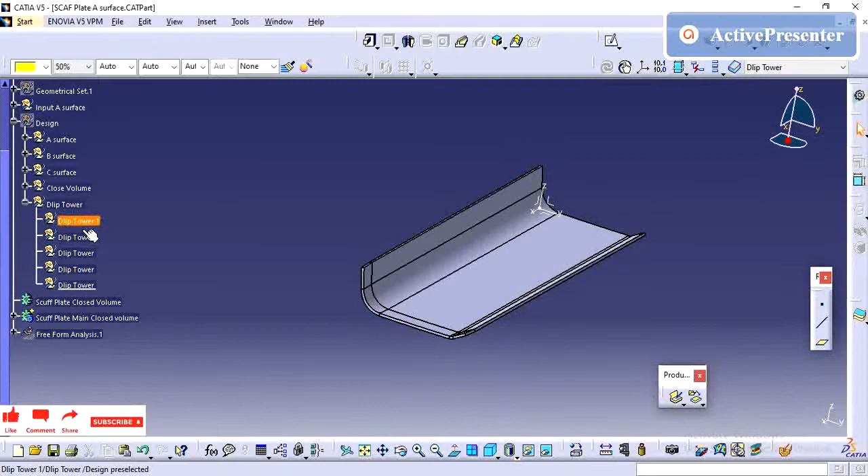I am just creating the geometrical sets. I designed the clip tower doghouse by giving the input of point, axis and direction. So what I am going to do is create the inputs for the doghouse tower clip.

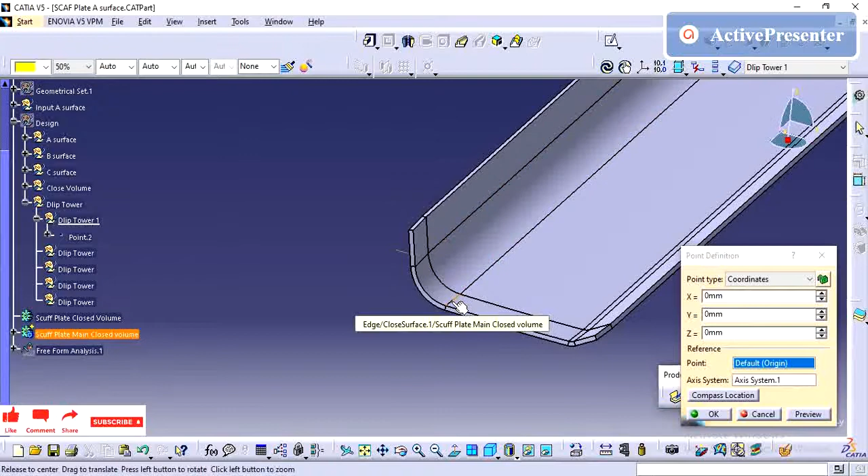Here we will see the attachment strategy. This part's overall length is around 390 mm. So my first attachment should be from the end of the part, and it should not be more than 25 mm. So I am going to create it near, taking 20 mm.

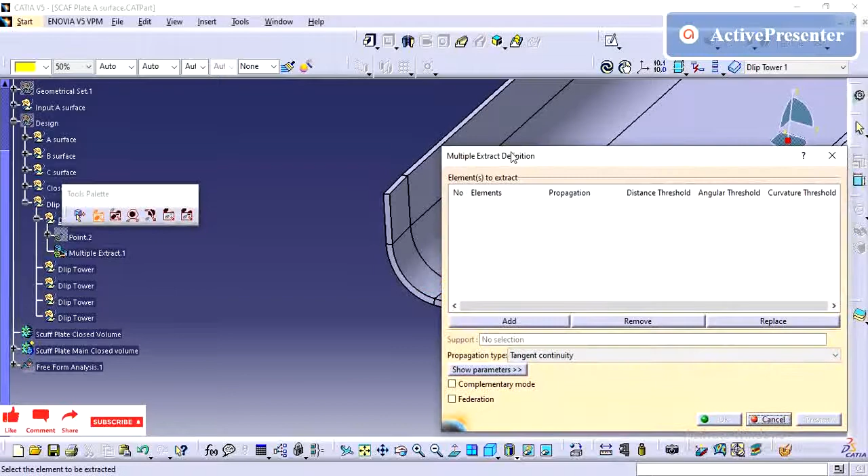This is the initial level, which you can create by following the design rule. In later stages, after getting the CAE analysis, your fixation location may change according to your test report. So for initial purposes, I am maintaining 20 mm from both edges to create the clip tower doghouse.

We are going to use the metal clip for this attachment strategy. I have created the clip tower as per the standard size. For standard features used in your design, you can create them and save them under catalogs, so it will be helpful whenever creating a part, and you can simply pull the profile.

So I am going to create the line with 20 mm from this edge. The same way we need to follow for all the 4 clips on the edges.

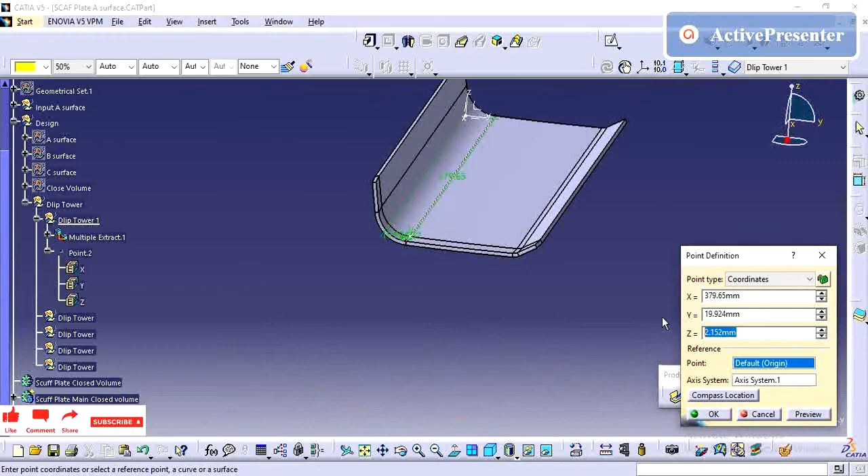If you follow this video, I have clearly explained it. If you want to see the close volume creation, check part 1 of the same sub playlist. Part 2 is this one, and part 3 will consist of door seal locator and B-pillar snap attachment. Part four will consist of the parting line creation and tooling direction.

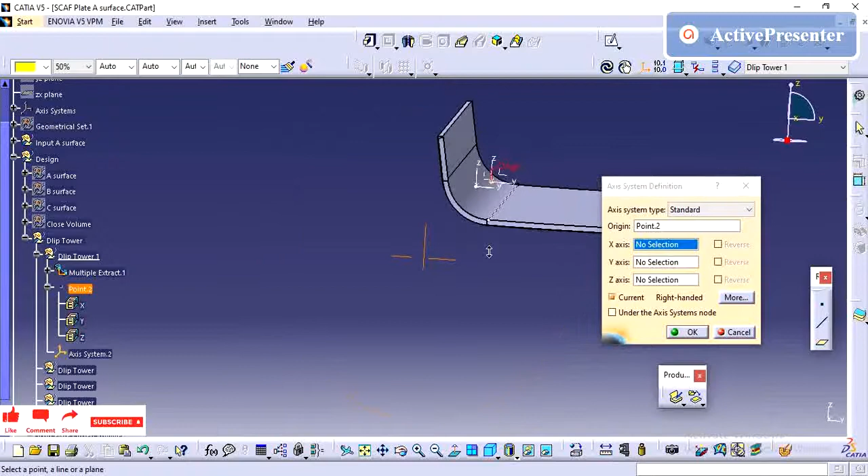This scuff plate part comes on the rear side under the door, so this is a hard trim part. This is the aesthetic part, located between the C pillar lower and the B pillar lower. In between these two, this part is covering the attachments.

In some of the cars, they will engrave the part name on the scuff plate, the car name.

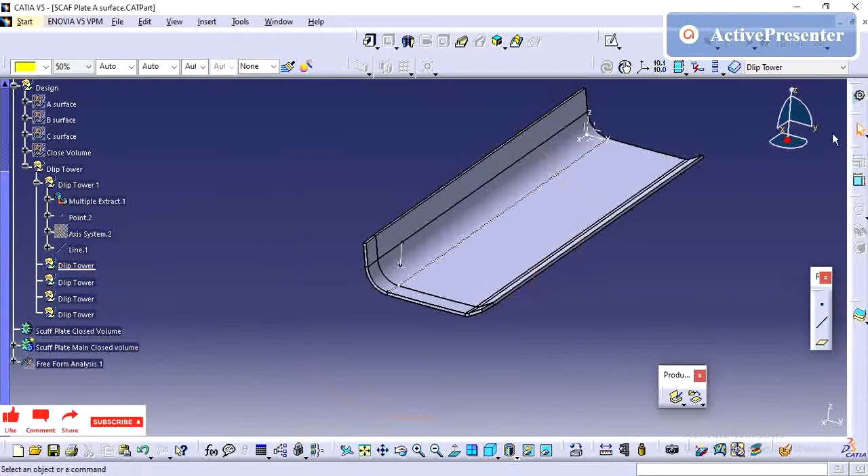So I have created the orientation line and I have created the axis system. The same way I am creating it on the opposite side.

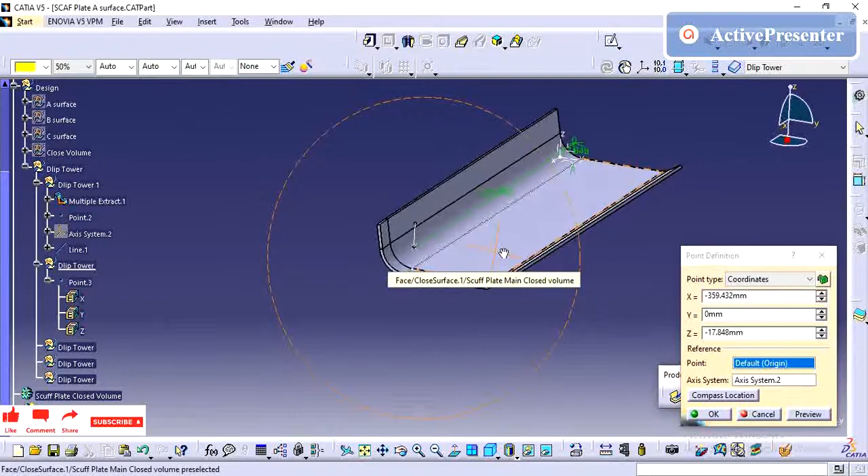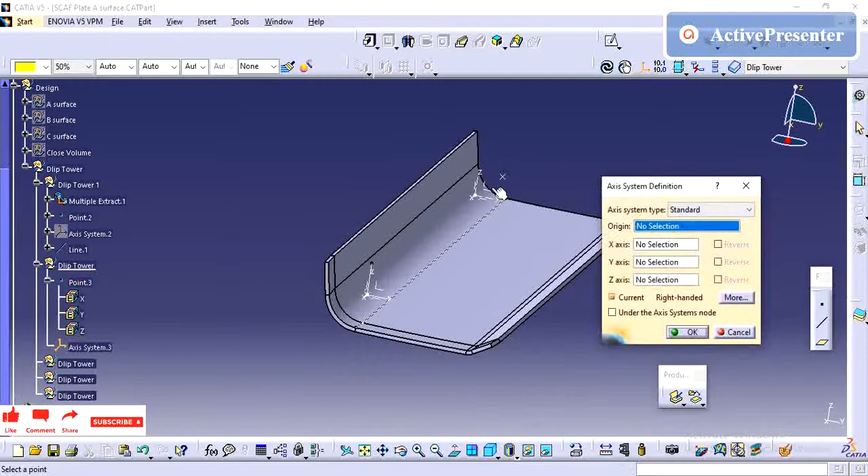Whenever you create the points, make sure it is related to coordinates, because if I want to move the doghouse in the Z direction, having the coordinate control points lets me easily move it.

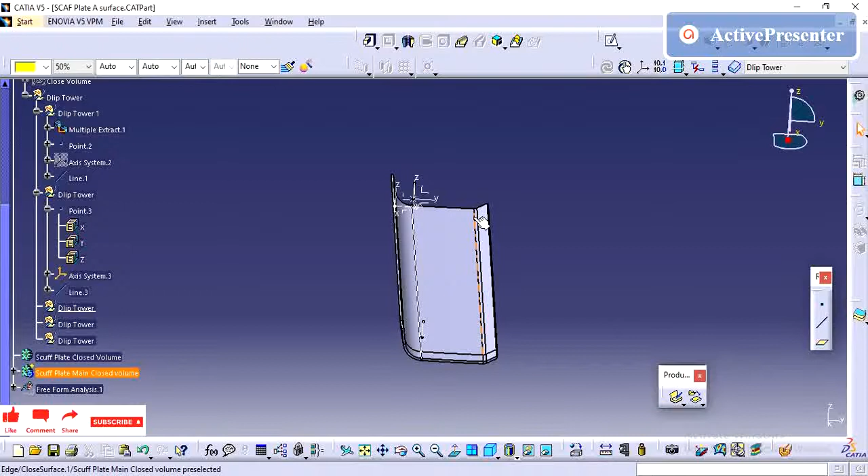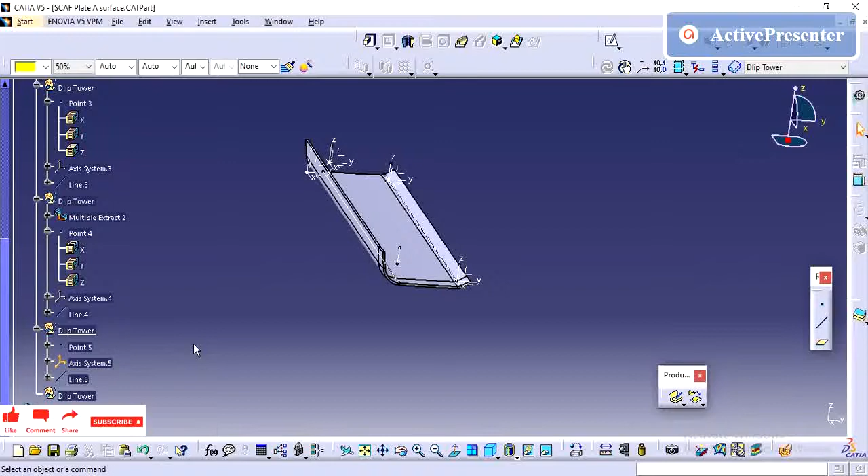So I'm going to pull the clip tower doghouse. I have already created it as a power copy, and the inputs also I have created.

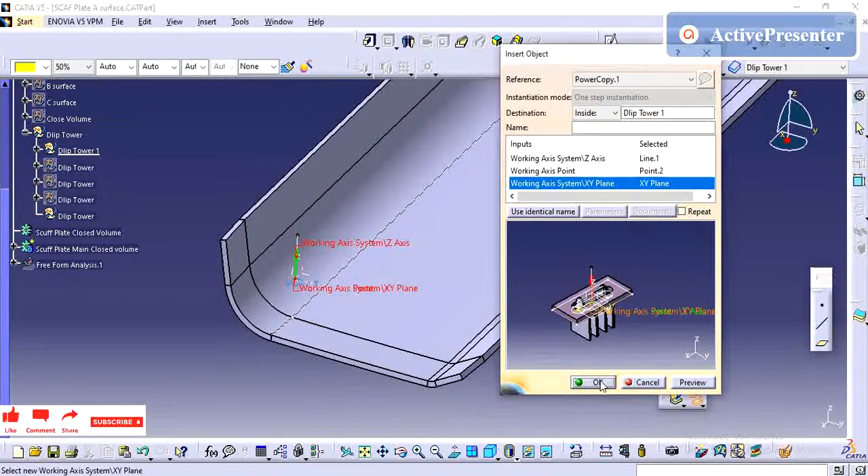First I am giving the orientation line, then point, then plane. If you want to see how to create the power copy and how to create the clip part, please check the description, I have provided the video link.

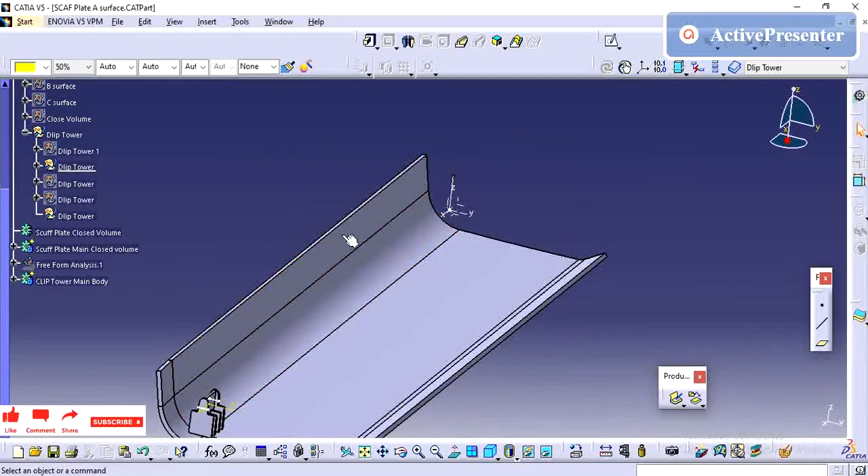So one side it came. For the second side I'm doing the same, for all the 4 sides we need to do the same. So for all 4 sides I have created and added in this video.

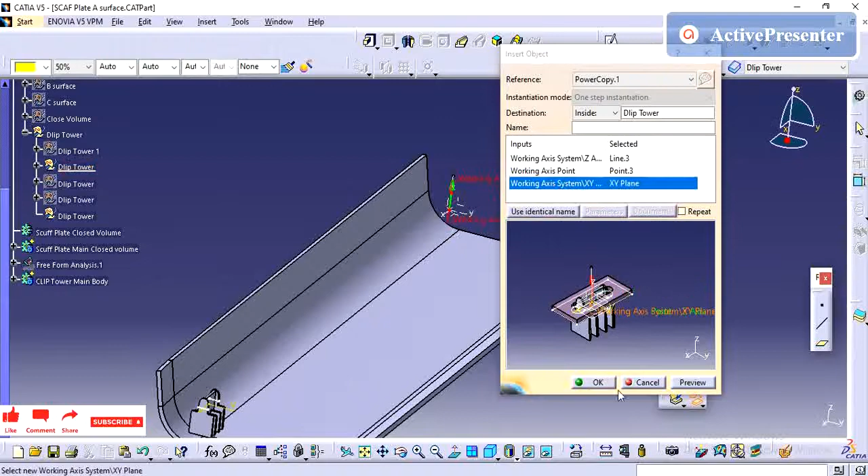From the edge of the part, your first attachment should be less than 25 mm. I have followed the same, and then you can have the second attachment below, in between, it should not be maximum 150, minimum 100 mm. So my fifth attachment will be on the center.

In this video I have not created the fifth attachment. To create it once again would take more time, so that is the reason I have not added it at the center. According to your requirement, you can create the clip tower and its orientation.

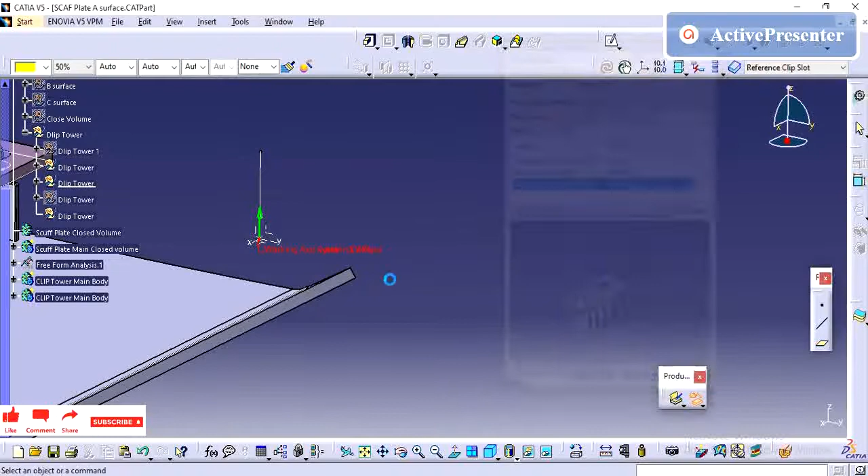80% of the scuff plate profile will be the same, and the same attachment strategy they used to follow as per this video.

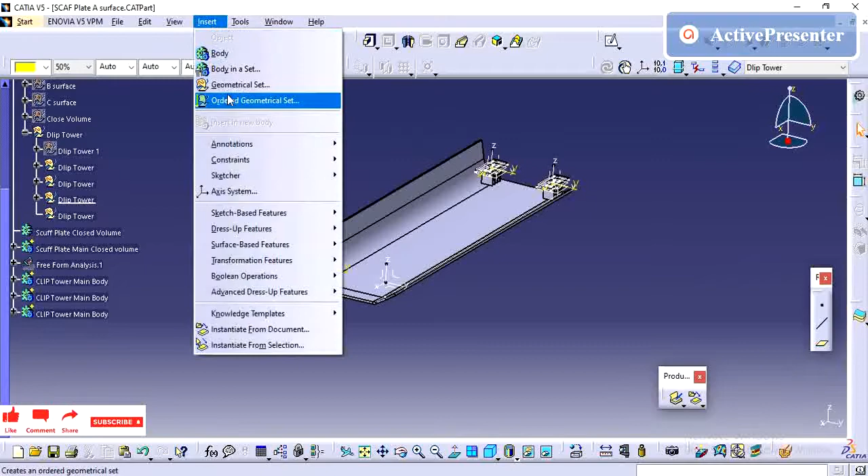If you are a beginner, this kind of trim part is usually given for the tool test. If you are looking for a job in automotive trim design, you can go through this video. It will be helpful for you.

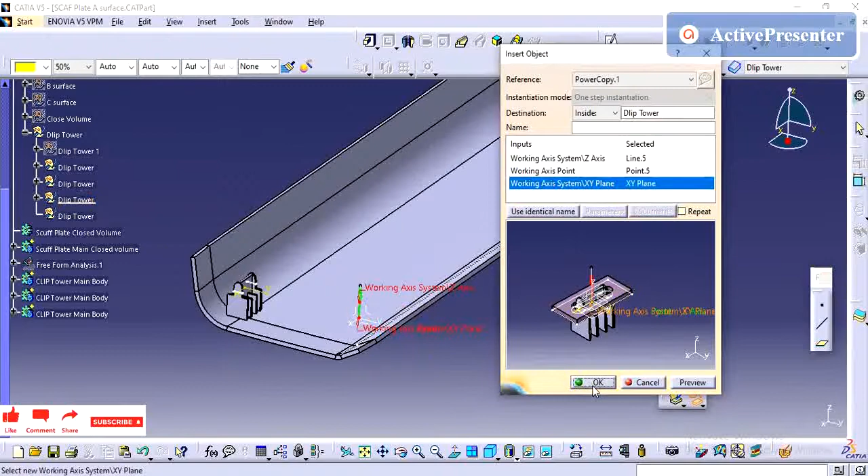So for all 4 sides I have created this. I have created it on 20 mm height. Later on I will change it.

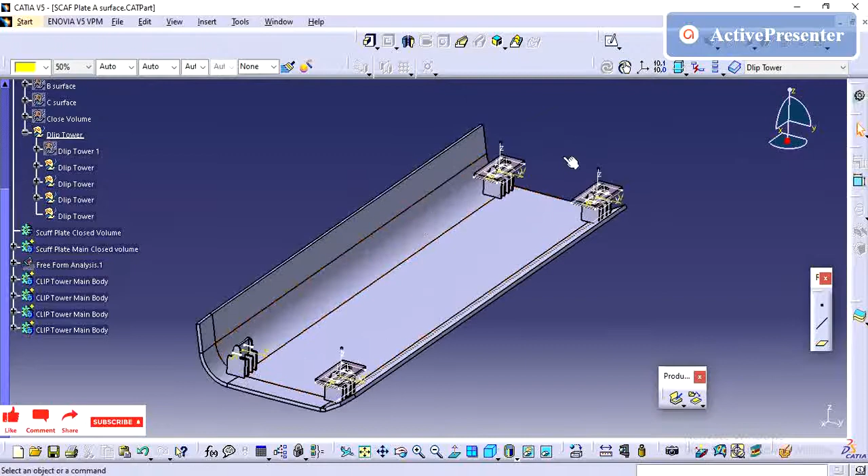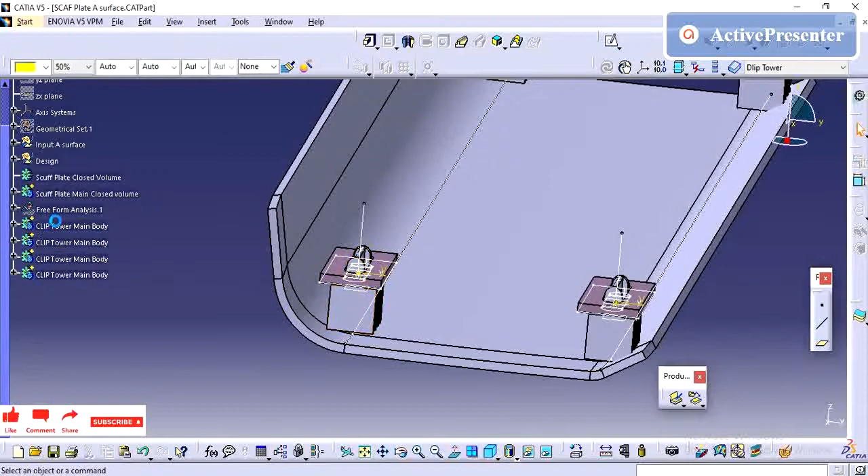So this one is reference. On the mating part, the attachment area we need to have this much flat at least, and this profile should have the bend, and it should match with the reference profile.

So next time I'm going to add all this clip tower inside one body, so that it will be easy to do the trim operation.

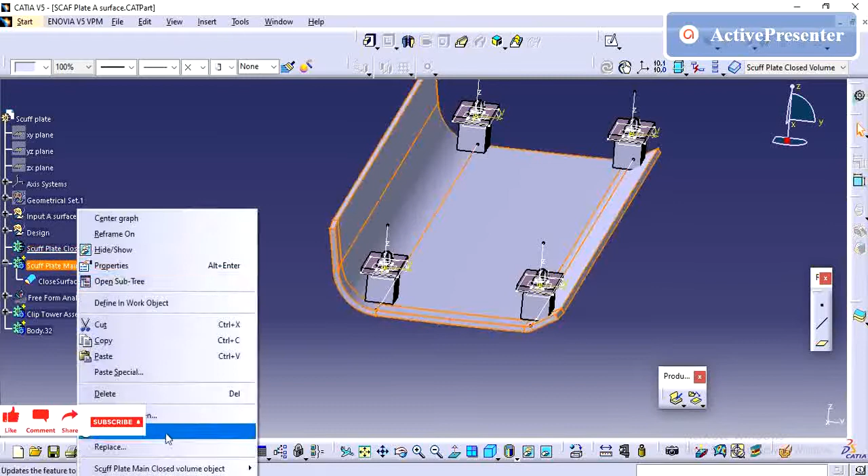Whenever you are adding any features, better you go with the trim option. Don't go for add or assemble. Maybe it will create some void on the part, so if you do trim, your profile will become proper without any issues.

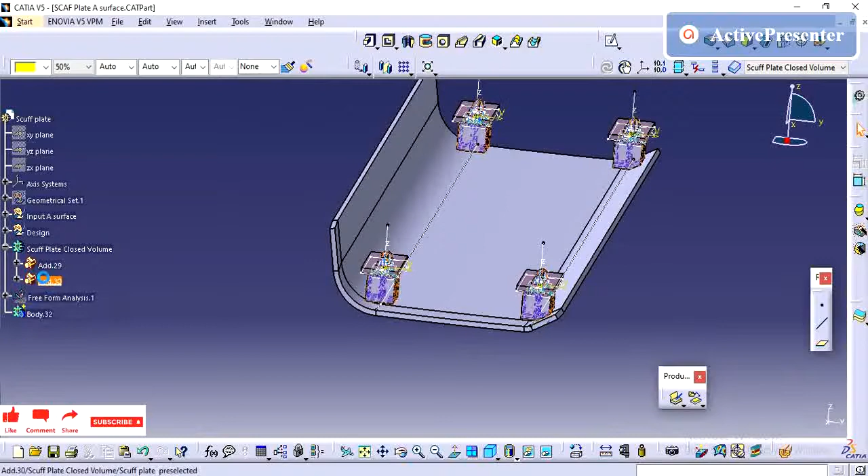So now I have added this. If you see, it is in the air. Just for checking that one, I have added it. If I have done trim, it won't create, it will show an error.

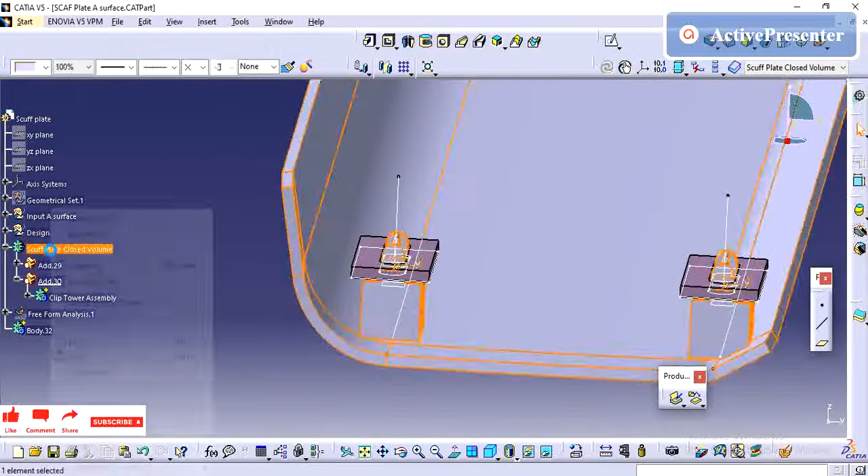So what I'm going to do is move this point below 5 mm. If I have not done this, the point created by coordinates will take more time while updating.

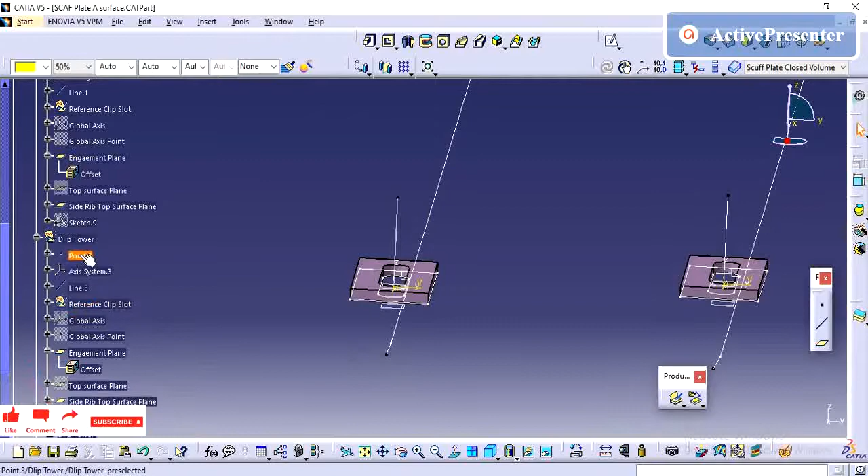So instead of 20 mm, I'm going to give 15, so that in the Z direction these all together will move 5 mm below, so that I can easily do the trim option.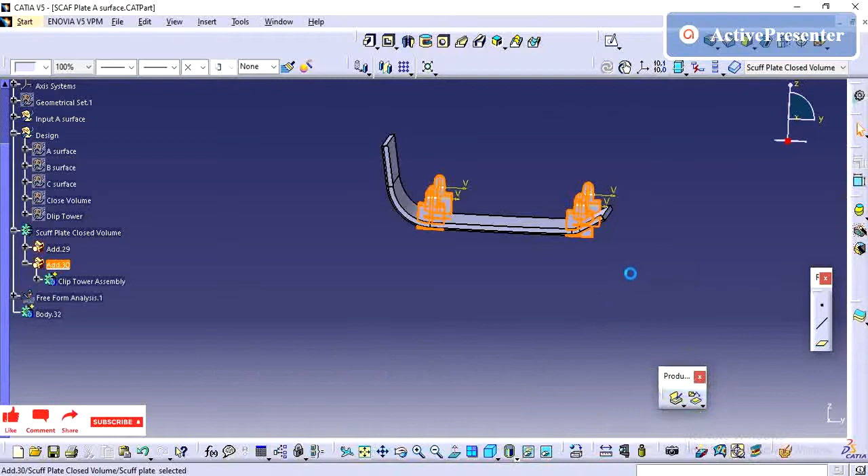I'm changing this add to trim. I'm going to select the surfaces which need to be trimmed on the rear side. If your profile is continuous, you can select only one. If it is not continuous, then you need to select individually.

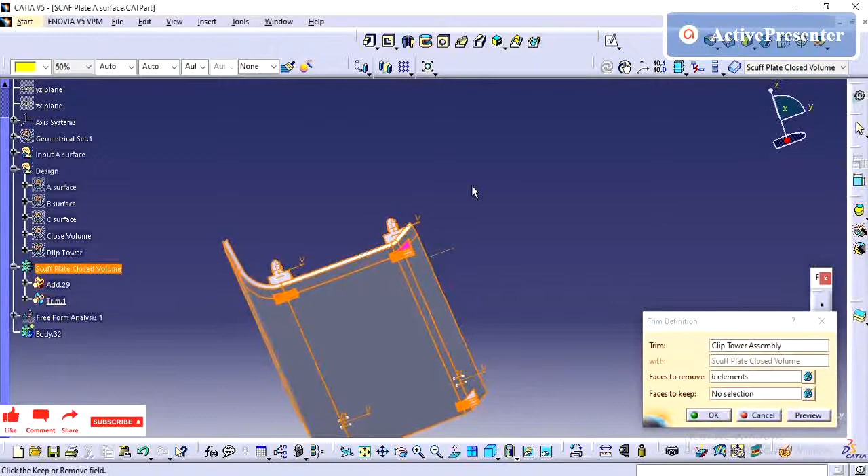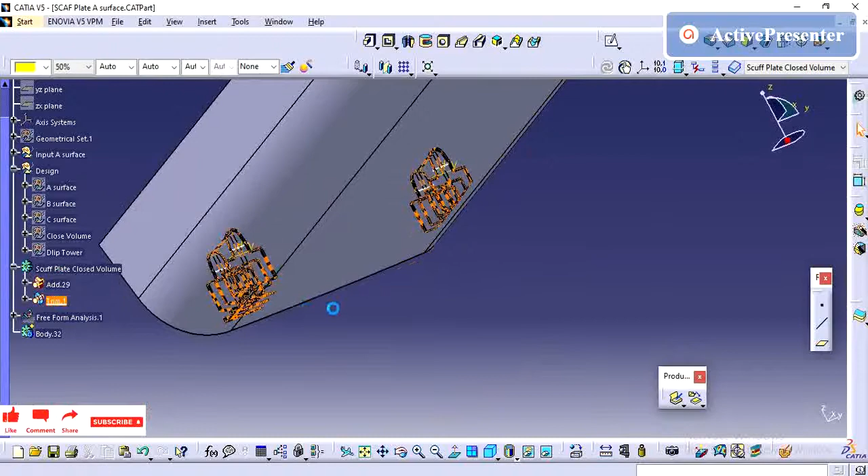Whenever giving trim, just check with one surface selected and give OK. If it is not trimming, then you can go and click on multiple surfaces. See, in this scenario it is not taking, so I need to give all these 3 surfaces to remove. This is how you need to work to reduce the time.

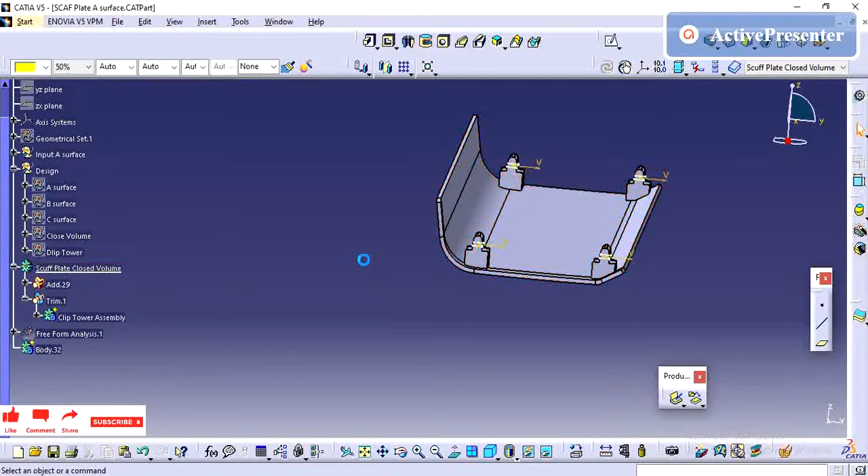So next we are going to add the strengthening ribs to the part. I'm going to create one more geometrical set for adding sketches, lines, points inside the design for the rib profile.

So I'm going to use the axis system for creating the sketch profile for the rib.

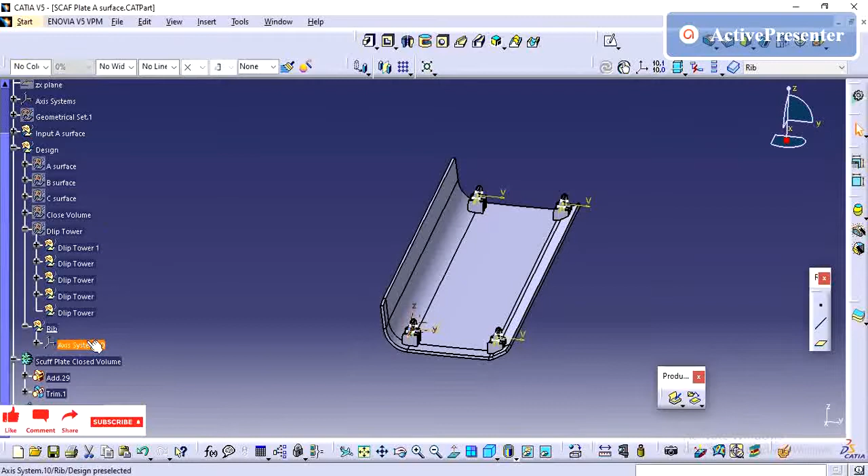For creating a rib, we need to follow the design rule. I have already created one video regarding rib design rule. I will provide the link of this video in the description. You can check that video for the design rule of rib creation.

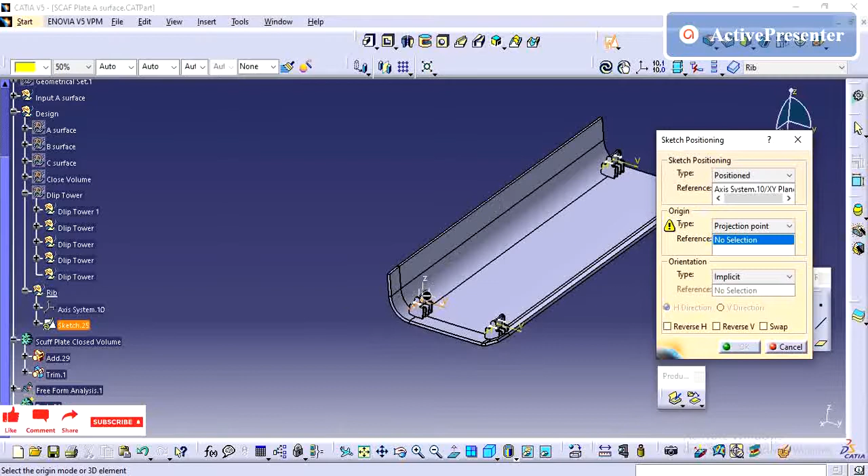So rib is to add strength to the part. If it is a longer part and if it is having any warpage, the rib will help to fix that.

I'm going to create the sketch.

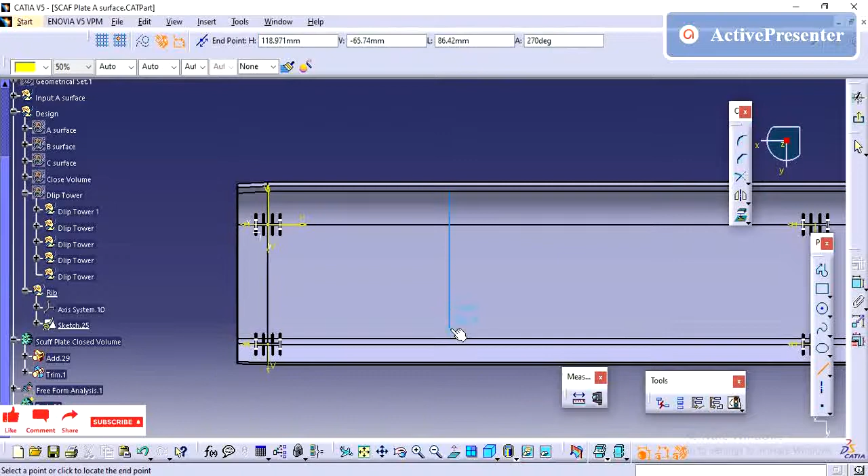So this part is a longer part, it is around 400 mm. So we need to have the rib horizontal to this part. If you are adding it vertically, there is no use. You need to add it horizontally so that it will reduce the warpage defect.

First, initially we need to add it roughly. Later on, once the CAE analysis is done, according to that you can modify your ribs, so that it will be a properly designed part.

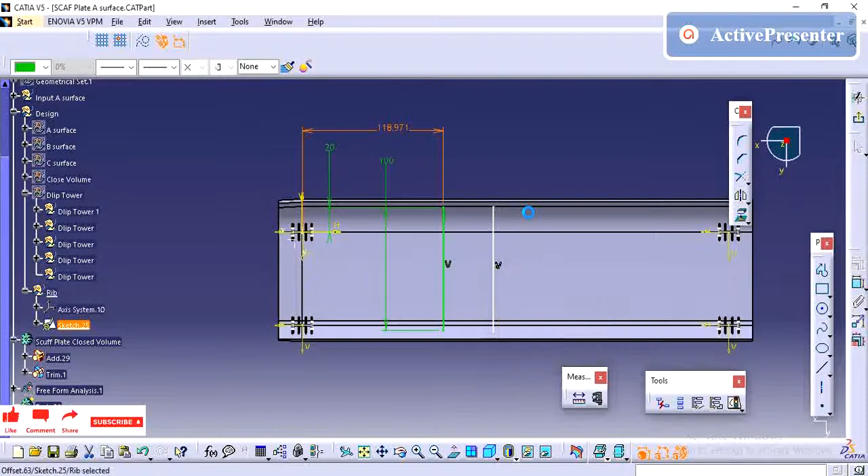And also we need to consider the environmental parts while designing any feature, whether it is having proper clearance or locking properly, or if it is having any interference. We need to avoid all interference with the surrounding parts.

So I have drawn one line and offsetting it to some 30 mm. And for instance, I have mentioned some 10 number of instances.

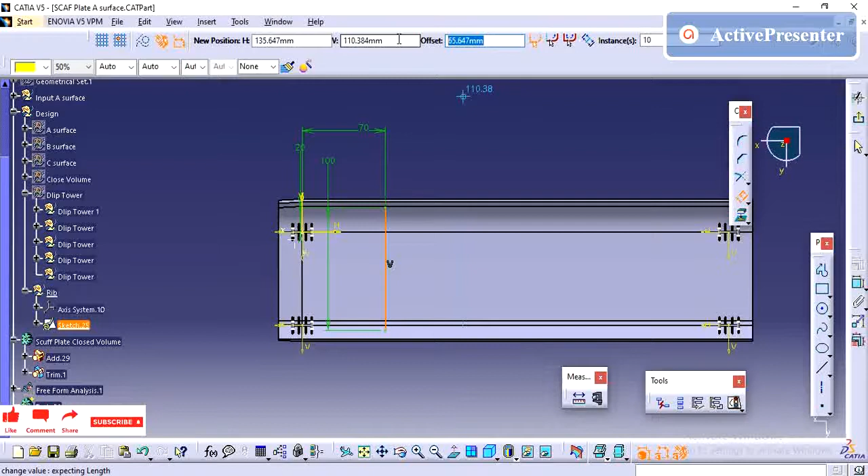So on the corners, anyhow we have attachment, it will also act as a strengthening to the part, so I have removed it in that area. I'm going to create it on the center.

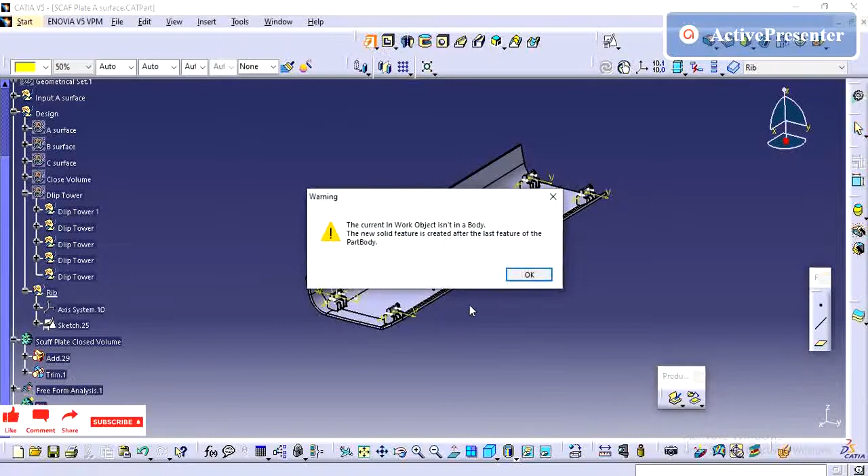So here I have created my sketch. I'm going to add the material. Whenever you are creating the features, try to create it in a separate body, then only it is easily editable. And finally you can trim that body with your main part body, so all the operations related to that feature can be under the single body itself.

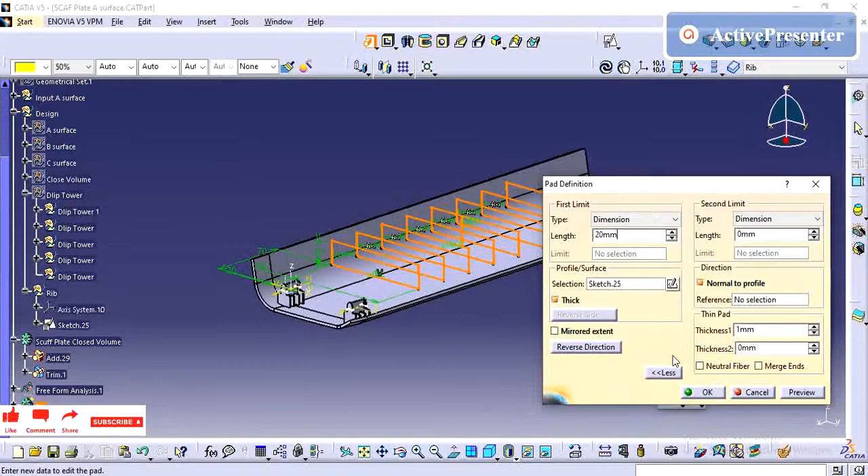So I'm going to reverse the direction and maintain the thickness of 40% of my nominal thickness. My nominal thickness is 2.5 mm, so neutral fiber selected, 2.5 mm into 0.4, then I'll get 1 mm.

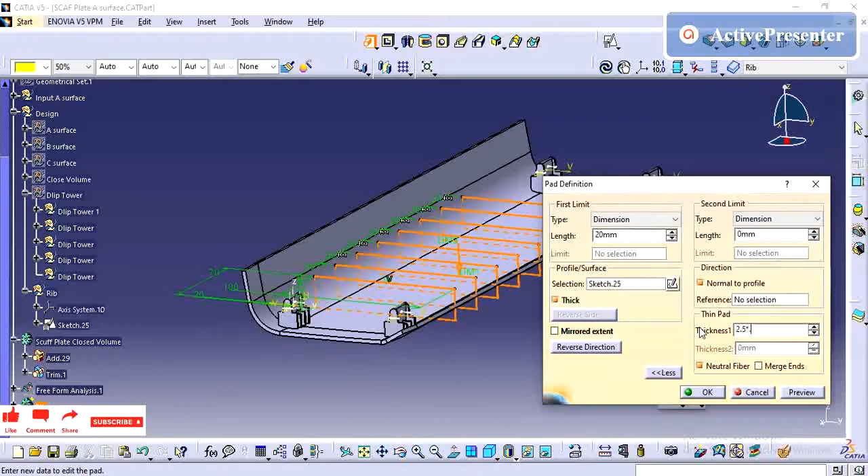So this is how you need to design the ribs. The spaces between the ribs should at least be a minimum of 3 times the nominal thickness. My nominal thickness is 2.5, meaning a minimum 7.5 mm gap should be there between the ribs.

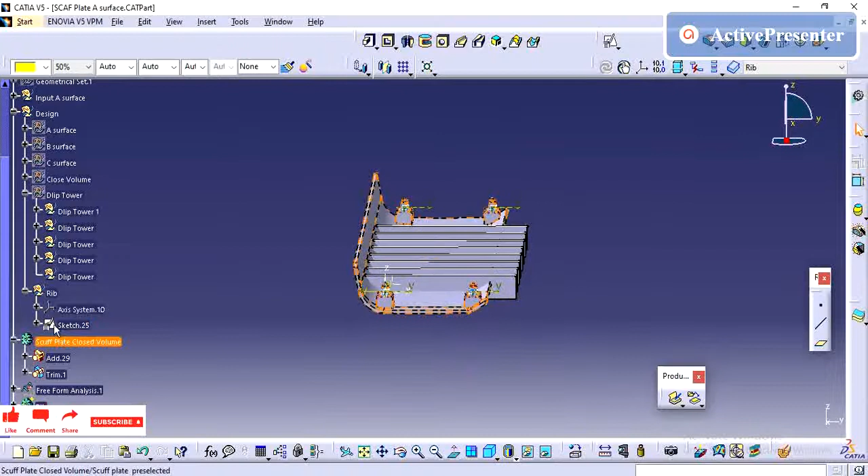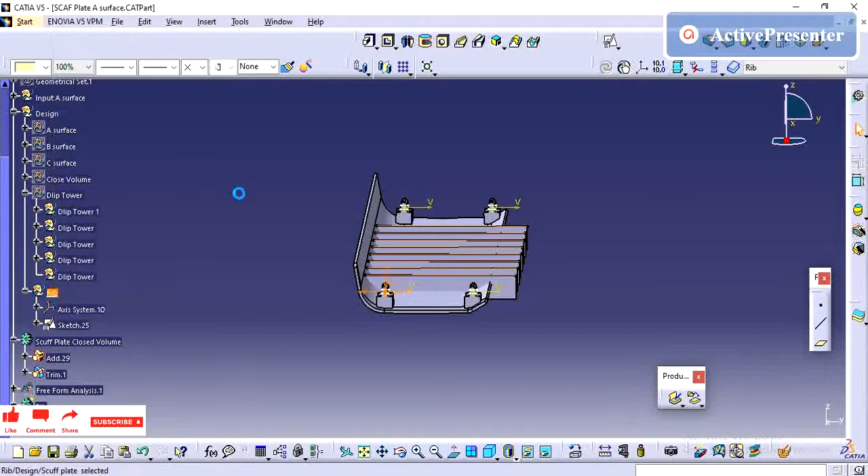Height depends on the draft value, and we need to maintain the minimum thickness of the part. Minimum thickness of a plastic part is 0.8. If it is less than 0.8, you will have the short fill defect, since material won't fill in that area on the mold. So these are the considerations you need to follow during the trim part design.

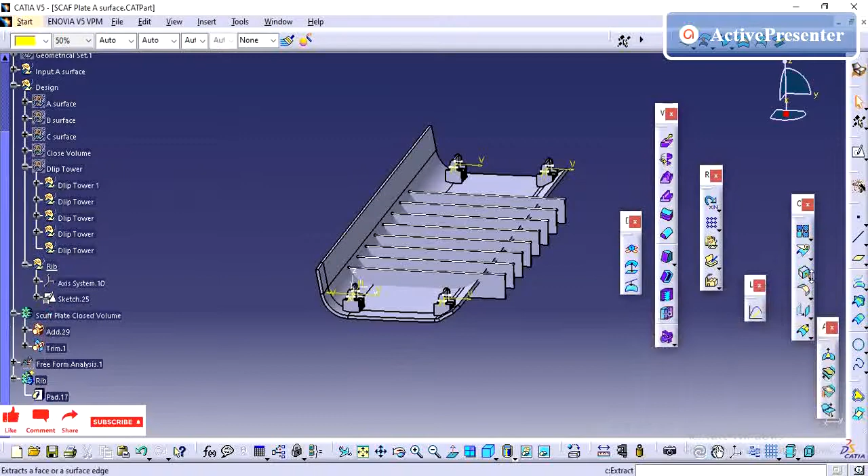So I am going to create a surface to remove the material on this pad. For the height of my rib I am going to use 3 mm, that's enough. So what I'm going to do is offset the base B profile, the B side of the part, offsetting it by 3 mm, and I will remove the material beyond that 3 mm.

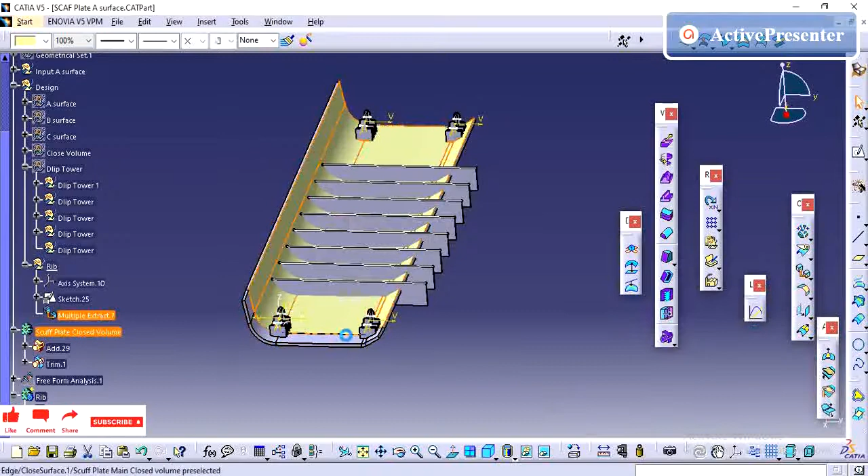If you want to discuss any part, you can add it in the comments. We will see that part and check the attachment features also.

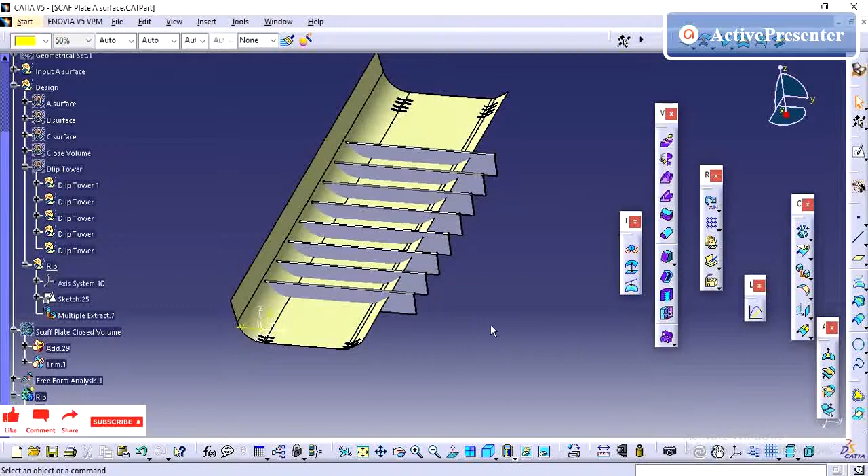This video consists of 4 parts. First part is generating A to B. Second part consists of rib creation and doghouse creation. Third part is the side profile attachment of door seal and locator on the B pillar areas on the sides. Fourth part will consist of parting line creation and tooling direction for this part.

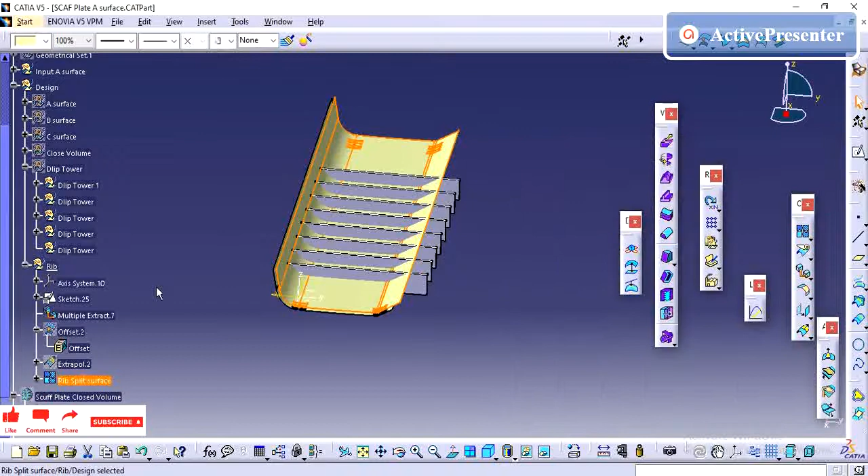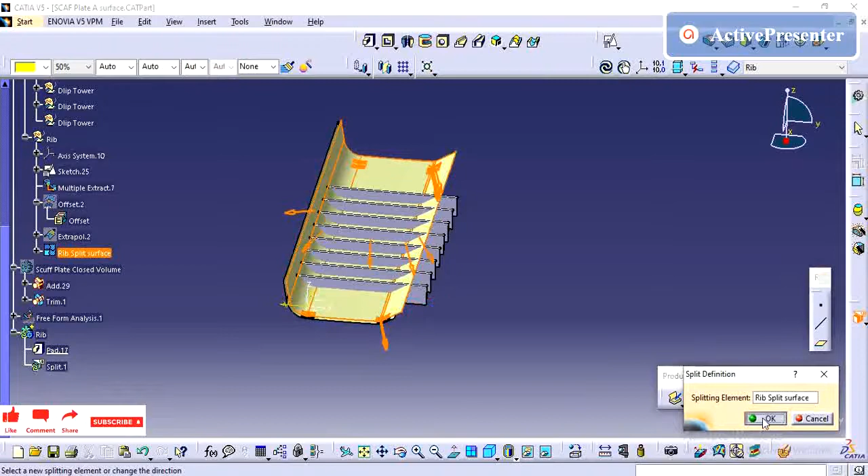So before splitting the part, I'm going to add the draft. Just checking whether it is coming properly or not.

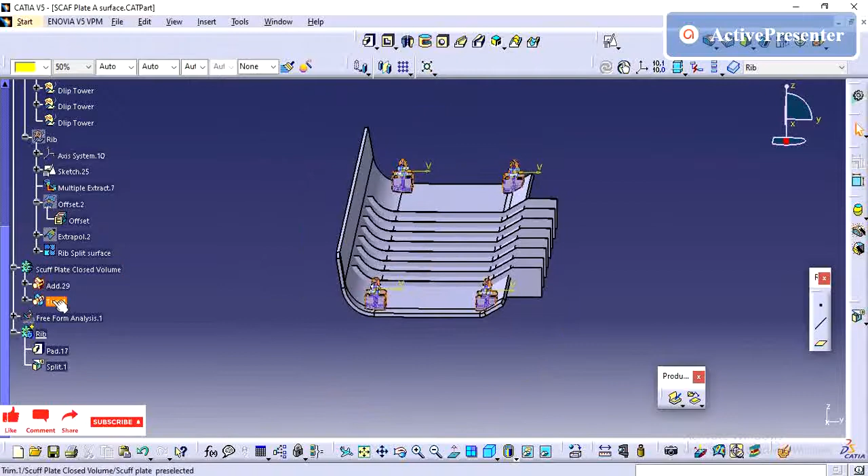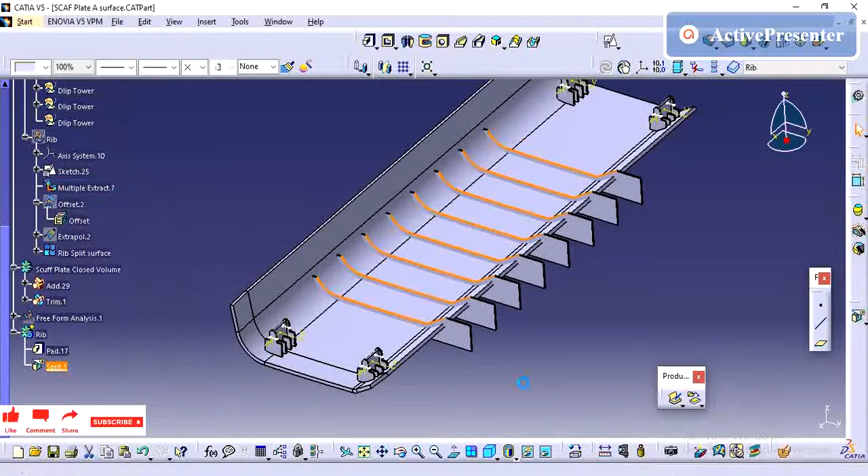So my rib is coming out. But if I try to trim it, it won't come properly. So I'm going to reduce the rib length. Otherwise I could do one more split on this side, but instead I can reduce the sketch length of the line with the help of the sketch.

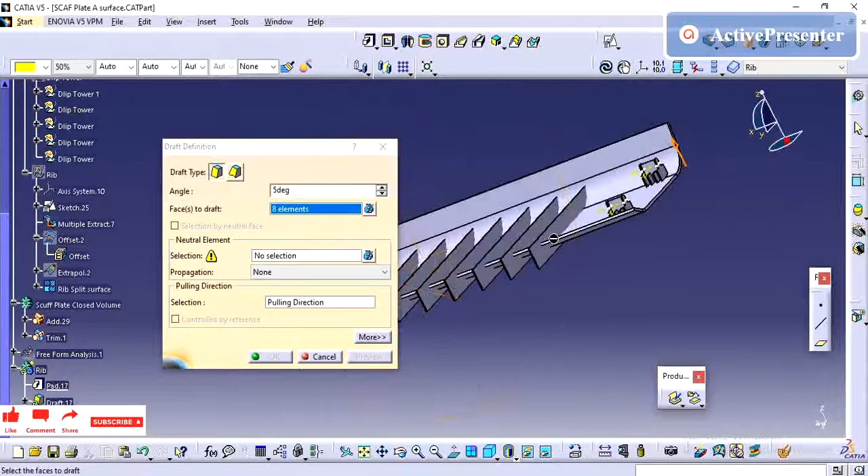Before that I will try to add the draft. So this is the body concept: all your features belonging to the rib need to come under one body, so that it will avoid confusion and it is easier to modify the part.

In the next part we will discuss the door sill attachment feature and the B pillar lower side attachment feature, which acts as a locator.

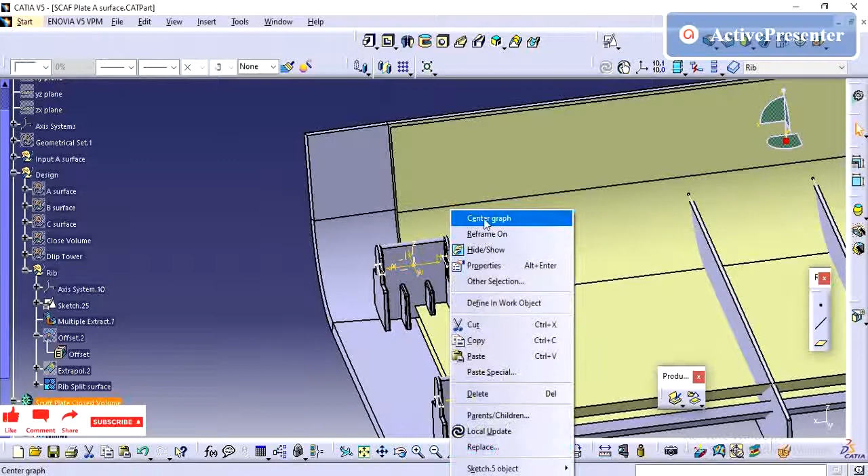Just hiding it because I'm not able to get the proper plane for that.

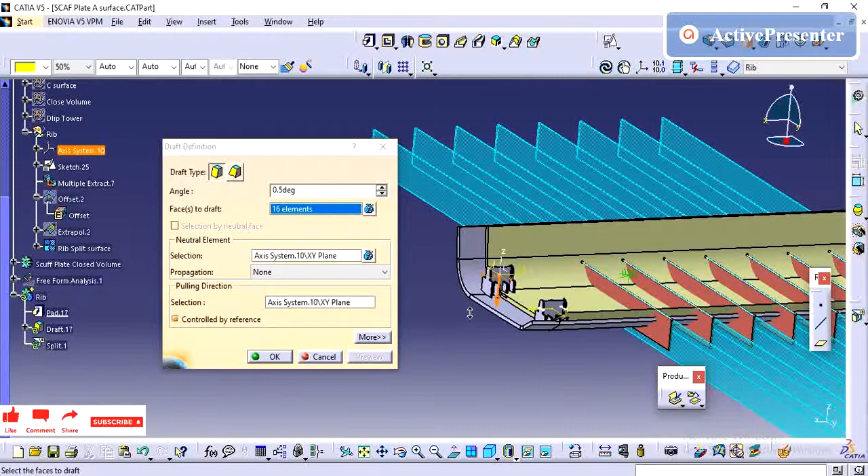So we need to change the draft direction. Here it is removing material, but actually we need to add some material from the top, then only we can clear it on the tool.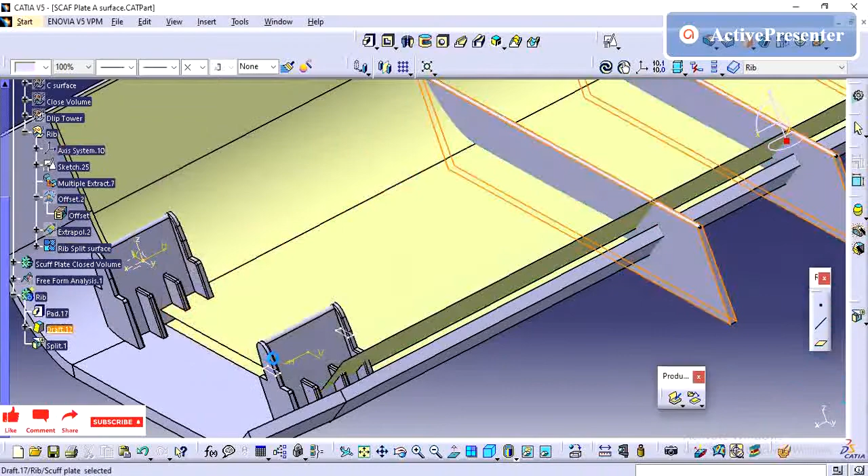Direction I have given as Z, neutral plane I have given as that axis system I used for sketch creation. Changing the pulling direction so that now material is adding on the sides. So I have provided 0.5 draft. I think it's enough for the ribs.

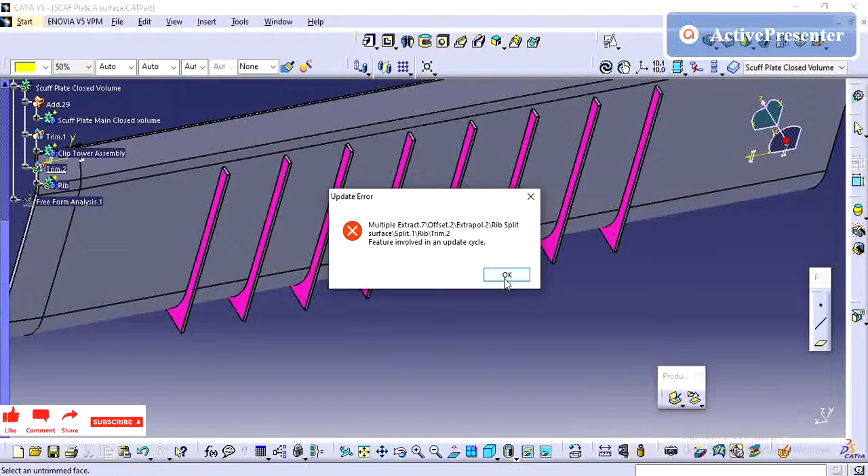Now I am going to trim the unwanted material using the trim option. So this error I am getting is because the splitter surface which I took on the B surface is now modifying, since we're adding this material.

So what I am going to do is just isolate it. If you are getting an error, check what it is and where the issue is. So if I isolate this surface, I won't get that error.

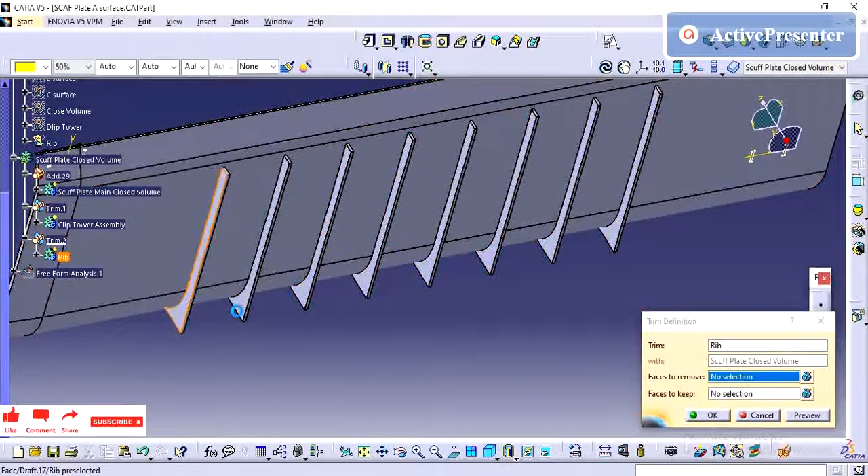I'm not going to change anything. If my B surface changes, in that scenario I will need to give that once again. As of now, there are no issues if I isolate that surface. So now I can trim it.

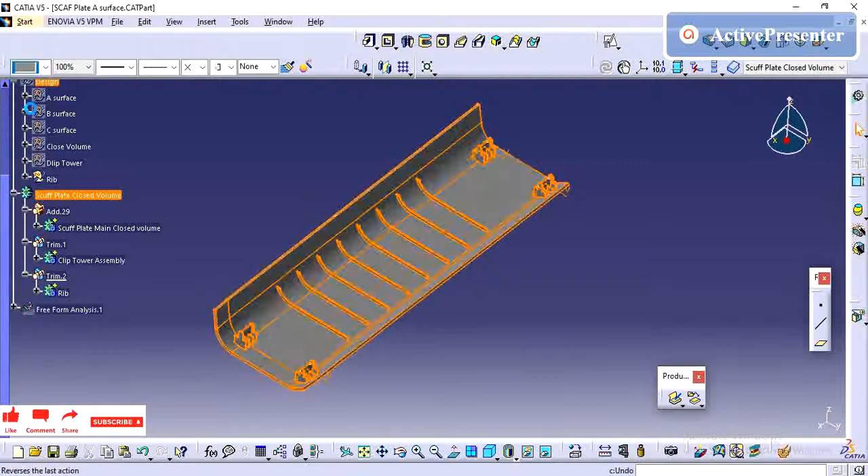So in this video, we have seen the rib creation, doghouse and clip tower doghouse creation, and the design rules for the doghouse, clip towers, and attachment features. In the next video, we will see the remaining features. Thanks for watching this video.